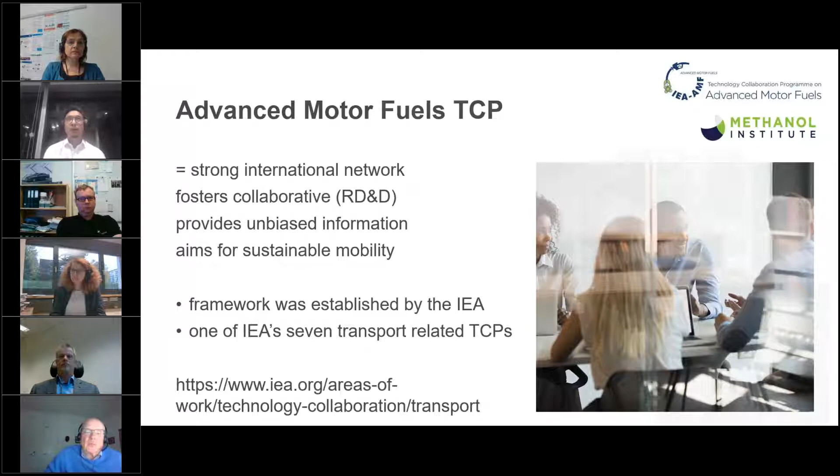So the idea here is to pool and leverage knowledge and research capabilities from different countries, and in fact different regions of the world, exchanging best practices. We try to take into consideration local conditions. All countries are not the same, and there are different ways, incentives and hurdles when you introduce new fuels and new vehicles on the market. AMF does not pursue individual interests, and what we want to be and what we are is a kind of international clearing house for unbiased information on various fuel technologies.

So actually AMF was started in 1984 as alcohols as motor fuels. Our roots are deeply in alcohol fuels. In 1990, the name changed to alternative motor fuels, basically making space for methane gaseous fuels. And as of 1999, we are advanced motor fuels.

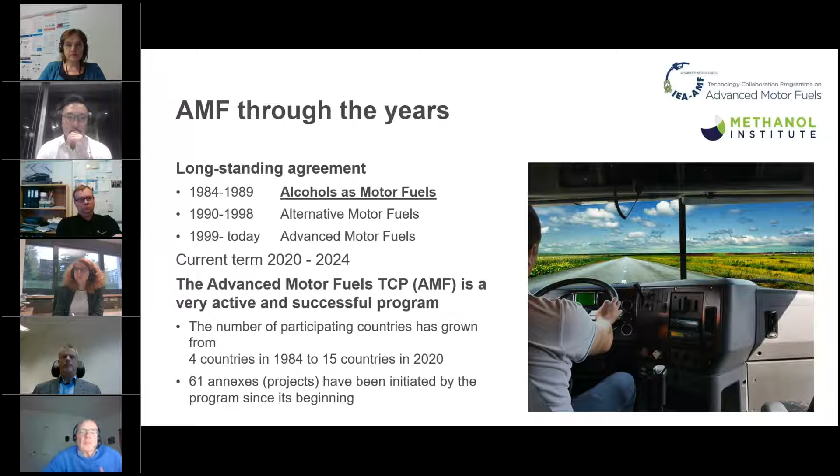So actually, to call ourselves advanced motor fuels is a smart way of allowing us to work on basically any fuel. There are some criteria. We have defined that advanced motor fuels are fuels that reduce greenhouse gas emissions, improve life cycle efficiency, have high energy efficiency both in the production of the fuel and the end use of the fuel, have low toxic emissions, enable fuels for new propulsion systems, and also fuels which contribute to the security of supply.

So AMF works on the entire spectrum of fuels, from feedstock through fuel processing, distribution, and finally end use in vehicles. However, we have to state that our focus in most cases is on the end use of the fuel. We of course work close together with other TCPs, and also cooperate within the end-use working party of IEA, and in some cases also with direct interaction, as in the case of Annex 56, which we have conducted in cooperation with the Methanol Institute.

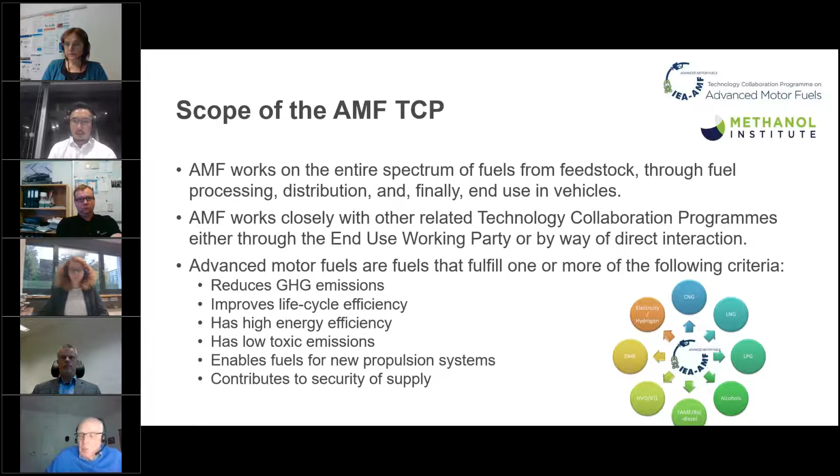So in our new strategic plan covering 2020 to 2024, we have stated a vision for AMF: advanced motor fuels applicable to all modes of transport significantly contribute to a sustainable society around the globe. So very important is that we can generate unbiased data for decision making on all levels of decision making. And as said, we are able to pool resources and share best practices around the world.

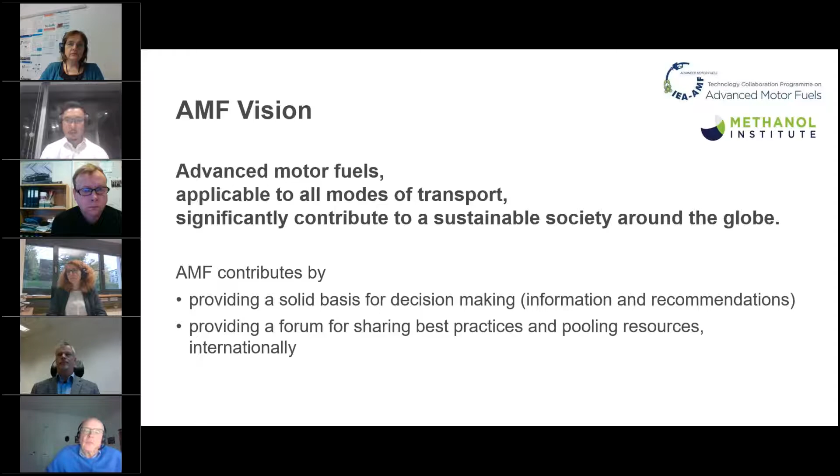So AMF and methanol. I think that methanol is definitely on the radar screen of AMF. Methanol is a versatile energy carrier. We have efficient processing of the fuel. We have multiple feedstock options, both fossil and renewable. There are no carbon-to-carbon bonds, which means that you have practically soot-free combustion with methanol.

There are several engine technologies possible based on assisted ignition. I guess that Martin will comment on that part. There is potential for high engine efficiency, and in fact, methanol fulfills most of AMF's criteria for advanced fuels.

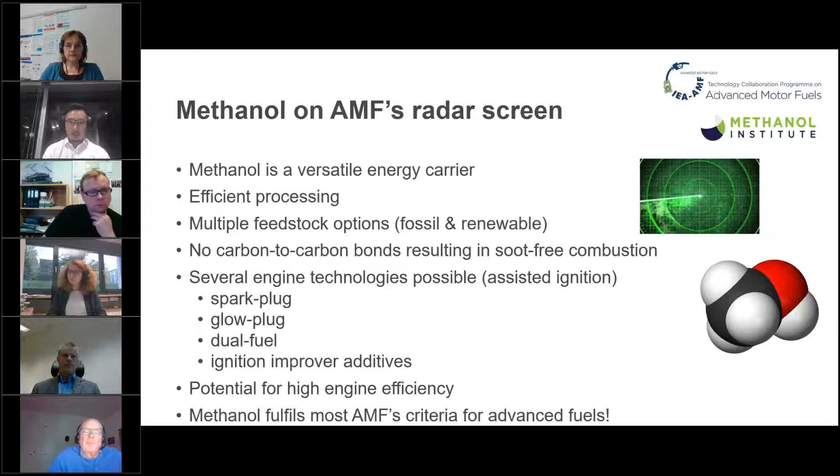As said, AMF started as an agreement on alcohol fuels, and over the years there have been many projects or annexes including alcohol fuels, meaning that we have had projects where we compare, for example, renewable diesel, gaseous fuels, alcohol fuels, and some of the annexes have been specifically on alcohol fuels.

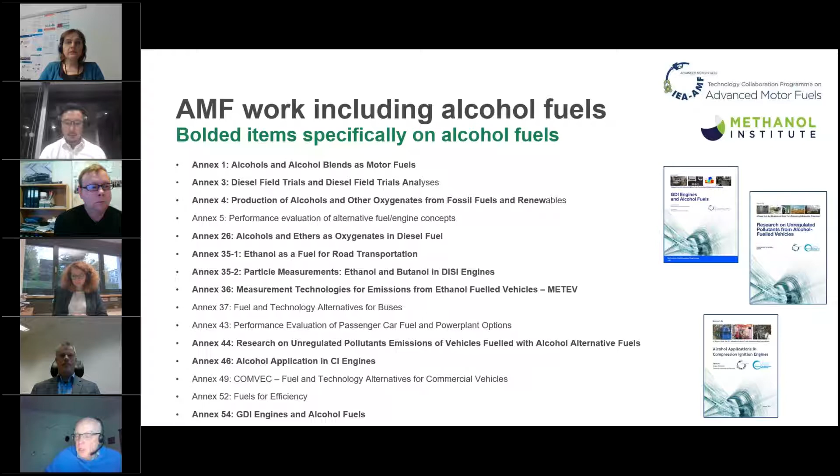So if we pick some of the newer ones, Annex 44 was research on unregulated pollutant emissions from vehicles fueled on alcohol fuels. Annex 46 was alcohols for compression ignition engines. Annex 54, GDI engines and alcohol fuels. And now the annex we are talking about today, methanol as motor fuels.

We are about to end a large project called Heavy Duty Vehicle Evaluation, and this covers diesel, renewable diesel, gaseous fuels, but also ethanol for heavy duty engines. And quite surprisingly, the ethanol engine actually showed the highest efficiency of all the vehicles, all the engine technologies tested. We expect that report to come out sometime early next year.

So we have, as said, 15 countries from all over the globe, from the Americas, from Europe, and from Asia. And there is a large number of research institutes and organizations participating in this work. So whatever we do within AMF has to have an international dimension.

So the AMF contacts, which you are free to make contact to, are the chair, Jesper Schramm of DTU in Denmark. We have regional vice chairs, Mr. C.B. Lee from Korea, and Mr. Michael Wang from the US. And our secretary, Dina Bacovsky, is in Austria, so she's based in Europe.

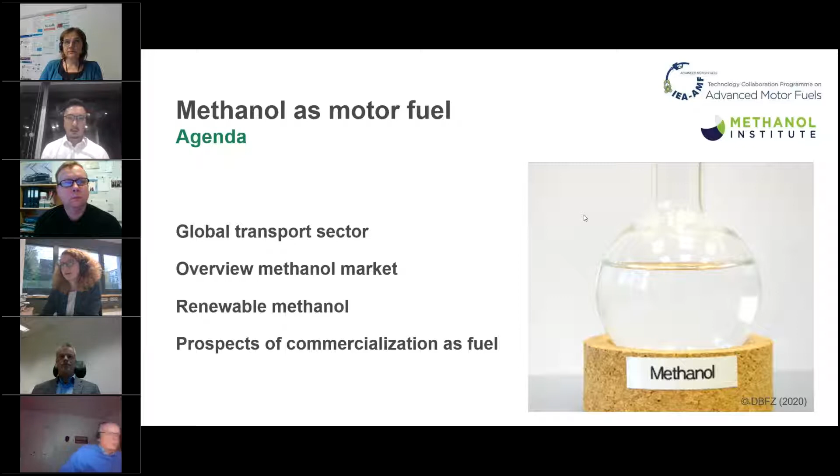Again, welcome from my side. I would like to give you a short introduction into the market of methanol and the role of renewable methanol. Tim, could you just go ahead with the next slide, there's much delay here.

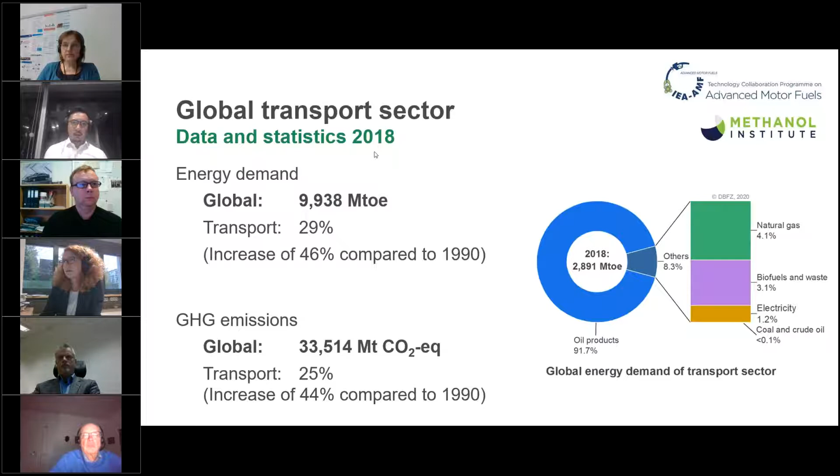Please, the next slide. Here you see the development of the methanol market as it is in the past years. We show here the capacity and the demand and use of methanol in different sectors. You see the main part comes from fuel applications, as straight or blended fuel, as intermediate for biodiesel production, MTBE, or like dimethyl ether or methanol to gasoline.

And of course, which is a minor role today but we will have an example on that, the role of methanol as an energy carrier for fuel cells. You see that the capacity increases quite a lot in the last years. We have more than 150 million tons of production capacity worldwide available.

There are many different applications of methanol. The main driver we see on the fuel market as a motor fuel is in China, where we have more than 100 million vehicles using methanol as a straight or blended fuel. As we will hear from the others today, there are also some interesting applications in the marine and fuel cell sector. But keep in mind, the key message here is methanol as a multi-purpose fuel, motor fuel application is just one part of them.

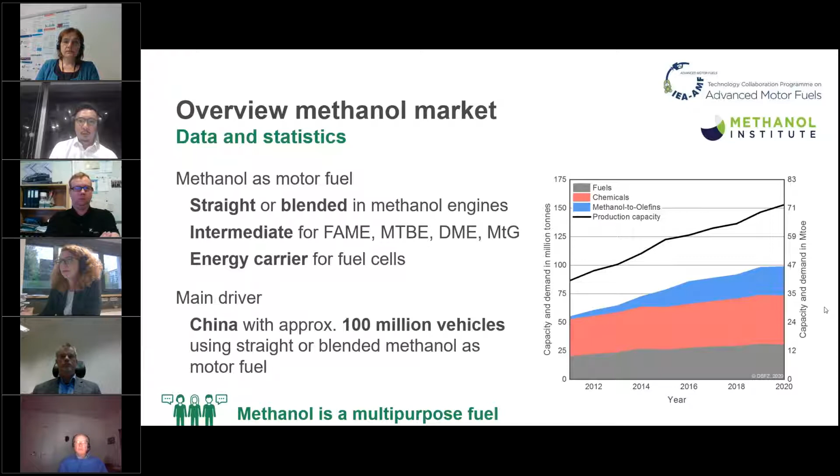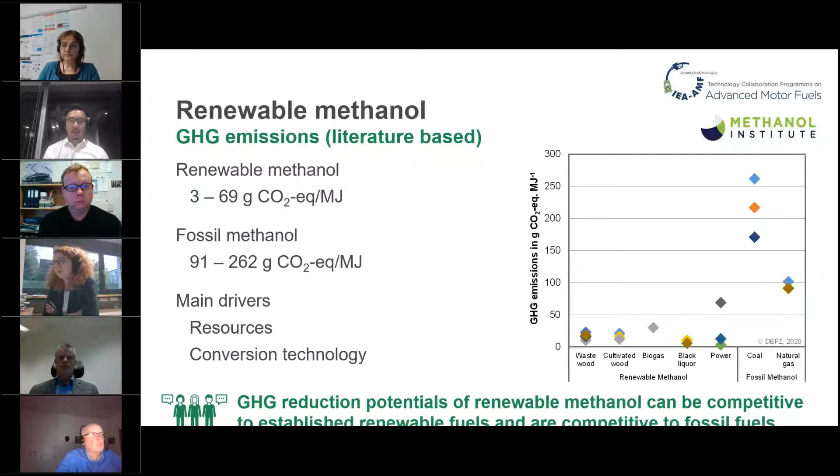Thank you. The same we did for GHG, we also did for production costs. Here we analyzed different literature-based analyses, normalized them to 2018, and compared them with different price levels, as you can see here. So of course renewable methanol, like other renewable fuels, is more cost intensive compared to fossil methanol, which is usually made from natural gas and a bit from coal, but natural gas is the most important resource for that.

We see that especially for power-based methanol, we have a wide bandwidth of production costs. And here again, just for information, renewable motor fuels in Europe have some price levels for ethanol as an alcohol, but also for biodiesel and biomethane, which are in that case also competitors for methanol. But anyhow, here you see again that in that umbrella, methanol could be an interesting option for the future as well.

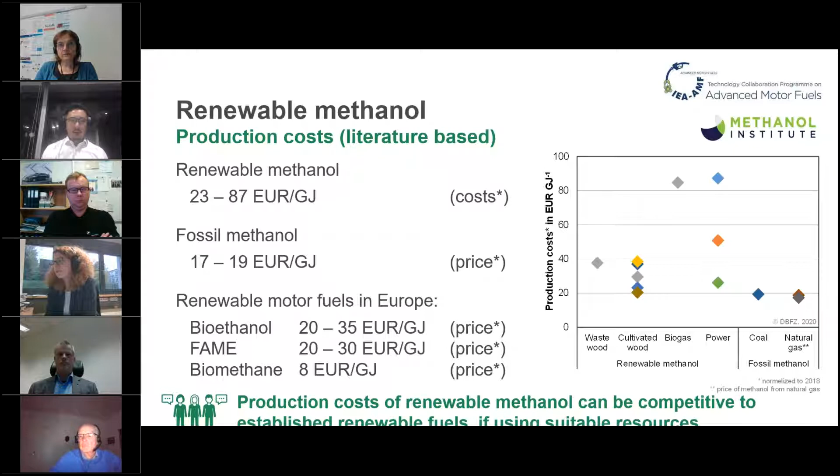Last but not least, please the next slide. It's quite important also to consider what are the prospects of commercializing methanol as fuel. As Niels already mentioned, methanol has a long history with different successes, so to say, in different regions of the world for different applications. And we see, like for other renewable fuels as well, that we have different barriers to be fulfilled on functionality, on scalability, but also on affordability, and last but not least on sustainability, which not just covers GHG mitigation but also several sustainable development goals.

These have to be covered or kept in mind regarding issues related to the use of methanol as motor fuel in different applications, like light duty and heavy duty. We will hear about different examples, but also the scalability with regard to infrastructure issues, with regard to supply of affordable amounts of methanol for the market.

And then this has to be brought in line with issues related on the strategy side to develop roadmaps, to develop stakeholder and shareholder networks from a very early beginning of implementing renewable fuels, together with issues related to technology aspects regarding the vehicle, but also methanol supply, but also regulations. Fuel standards are one example. Legislation to be mentioned, for instance CO2 regulations for different new fleets, including renewable fuels as well, for instance, fuel standards related to higher amounts of methanol blending, to mention some examples.

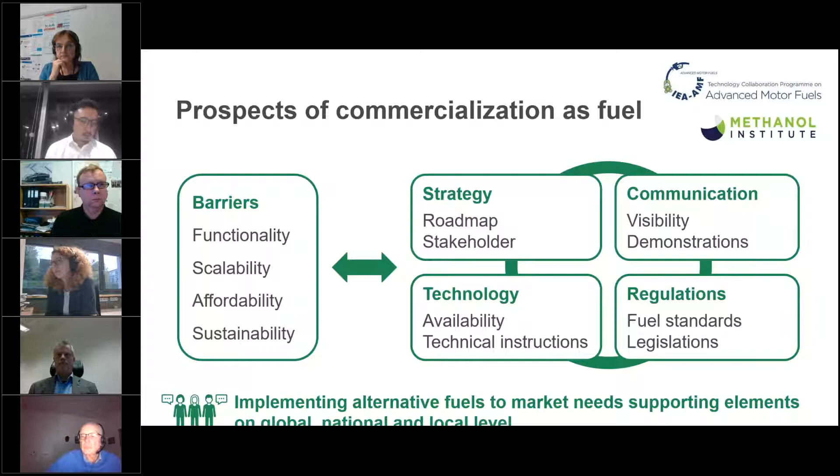So there are, the next one is my last slide, to be concluded with some of the key messages highlighted here. The others can be read in the summary report. As I mentioned, methanol is a multi-purpose fuel. One has to have this in mind when considering methanol also as a transport fuel. So there are interactions between the different markets and also the competitors, of course. I hope we could show that there are production costs and GHG reduction potentials for methanol that could be competitive also with other renewable fuels.

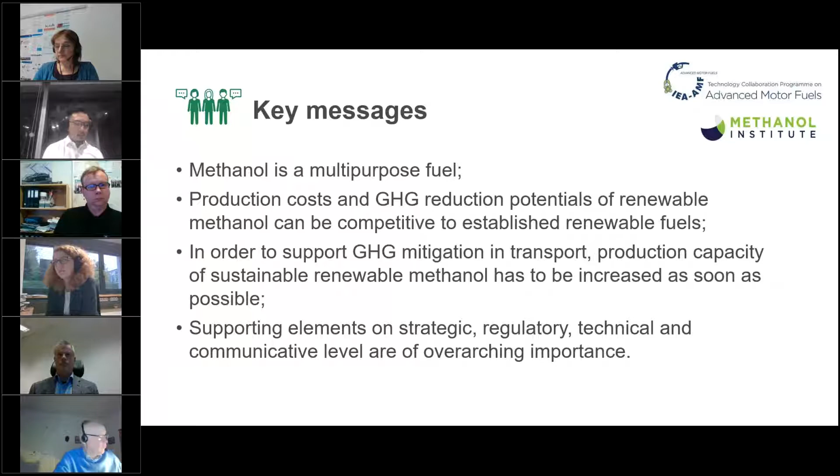I hope that we could show that we can also have an interesting impact for GHG mitigation and transport when increasing production capacities of renewable methanol. For our understanding, this is key when rolling out new alternatives again, or in some markets for the first time. And for realizing that, supporting elements are quite urgently needed on a strategic, regulatory, technical, but also on the communicative level.

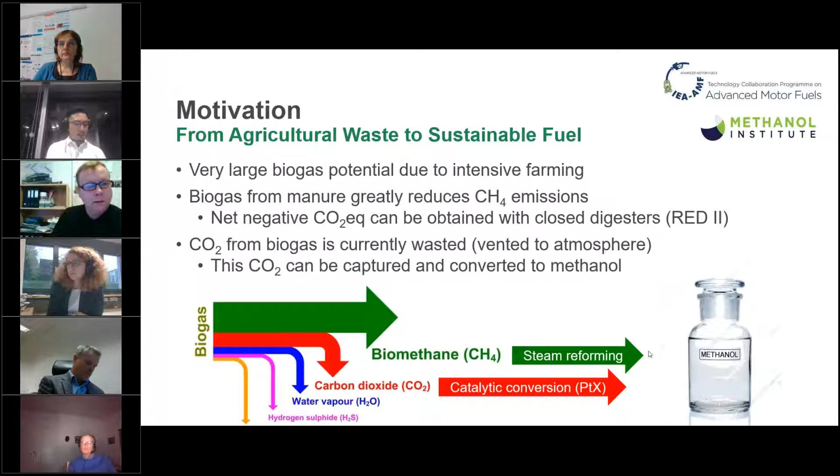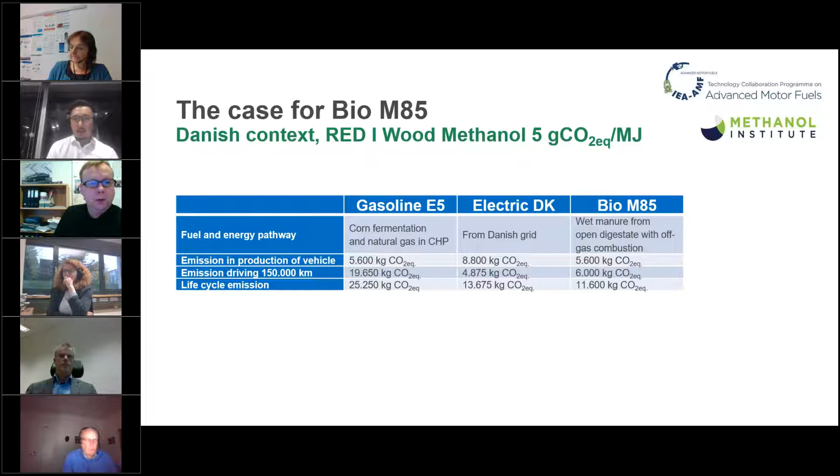I'm going to move on. So you might ask, if we have all that biogas, why don't we just use that directly? Or why don't you use the hydrogen from the wind power? And why do we want to make methanol? Well, simply it's more feasible for storage and distribution. If we were to use methane, we could do so, but we would require a lot of new fueling stations and also new cars, because current cars on the road do not run on methane.

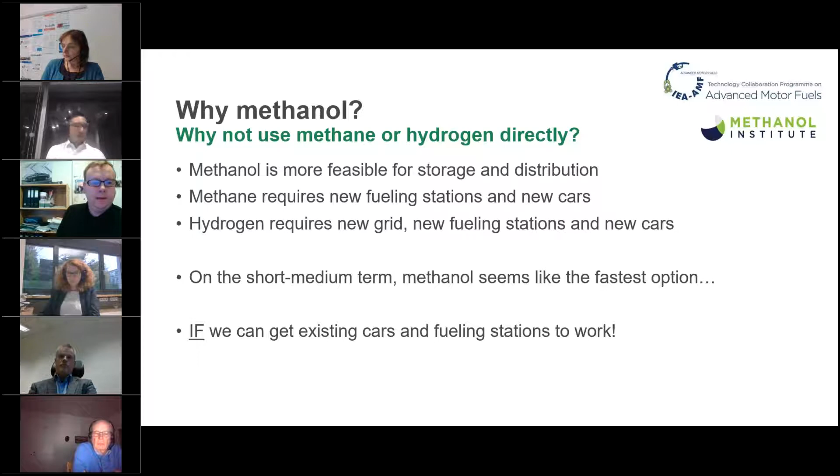Now, hydrogen would require a whole new grid because we don't have a grid for hydrogen. It would also require new fueling stations and new cars. So in terms of cost and time, it seems that on the short to medium scale, methanol is clearly the fastest option, if, of course, we can get the existing cars to work and the existing fueling stations to work.

Now let me talk a little bit about the cars. We've been looking at 2 cars so far. This is the old one, 2008 model. This type of car is actually very popular in Denmark, very small, but it does the job from A to B. It's a Euro 4 emission class, and it will run on pure methanol once it's warm. A cold start is another issue.

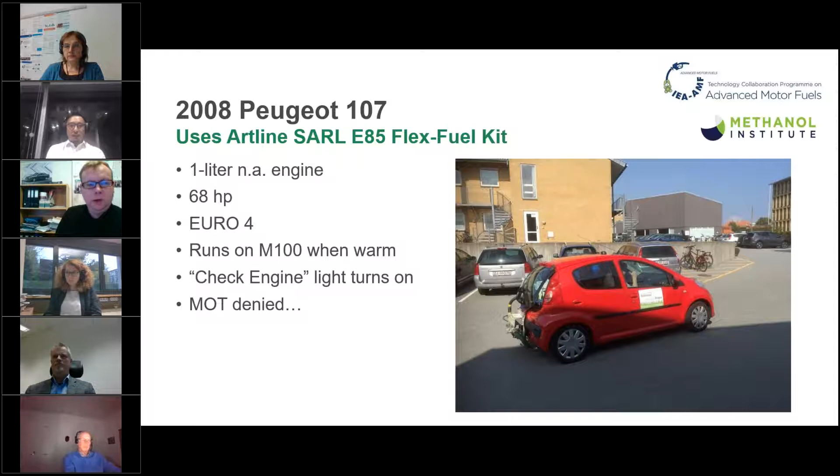However, when we use this Artline E85 Flex Fuel kit, it dramatically improves the running, and it improves the NOx emission, not the least. But anyway, once we've driven a few days on the methanol, the check engine light comes on, and when it does that, it's technically not legal to drive the car anymore. So we can't get an MOT on that. So we kind of gave that up and moved to a newer one.

This is the new one. This is a 2020 model, a bit the same size of car, but a much more modern engine, much cleaner vehicle. This is a Euro 6, so it meets the highest emission standards that we know of. The engine calibration was done by a race tech company, 2M Teknik in Denmark, the company that usually builds race cars, and it runs actually very well. There's no physical changes to the car, only software changes, and we're quite happy with that one.

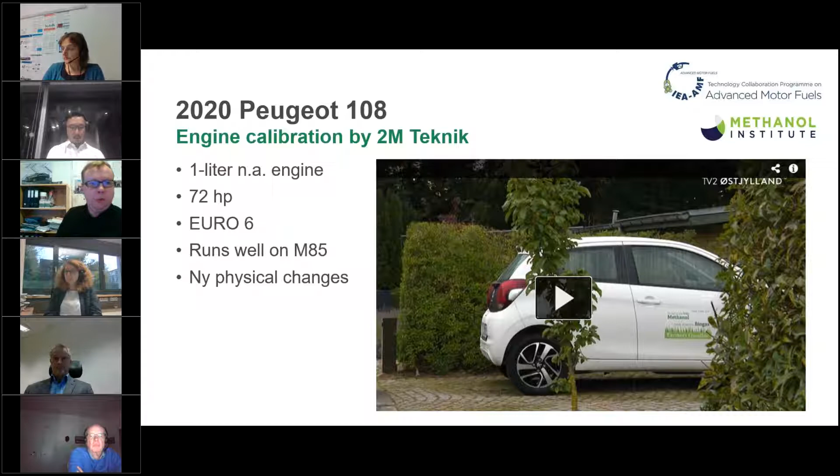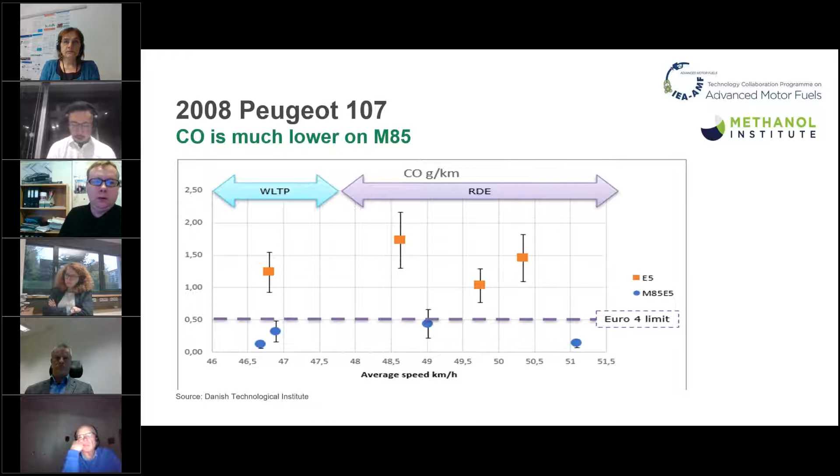Let's have a look at the CO emission, carbon monoxide. Well, that's clearly much lower on M85. There's really no question about it, and we are way below the limit. And with the new vehicle, we are even way below the Euro 6 limit. So it's very close to zero actually. So not at all a problem here.

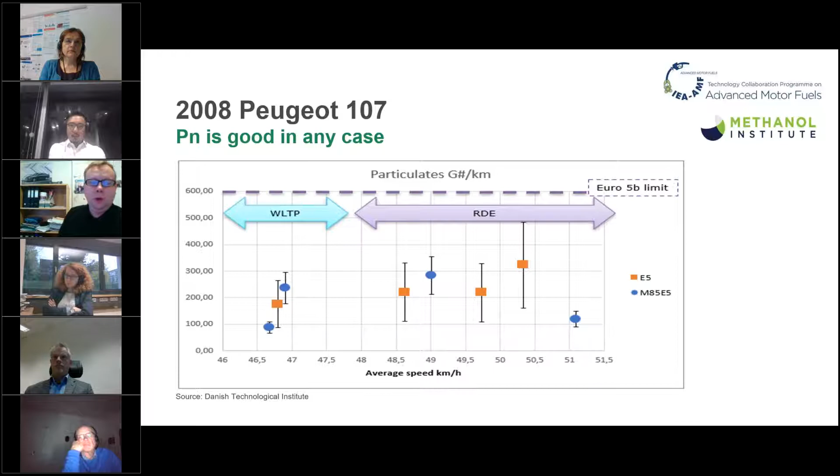Looking at the particulates, well, that's not a problem at all. This Euro limit 5B is actually still the limit for Euro 6. And you can see that we are well below the limits in any case, on both methanol and gasoline fuel. So we don't really have any problems here.

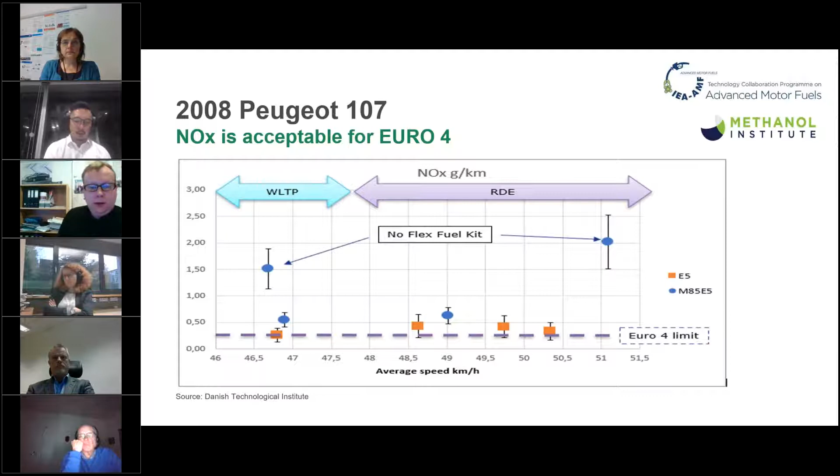Now, in terms of NOx, things tend to get a little worse. Before we installed the flex fuel kit on the red car, you'd see the two measurements that are actually quite high, up to 2,000 milligrams, and the current limit for new cars is 60 milligrams. So that's quite a bit of a way. But as you can see, the use of the flex fuel kit did actually improve things a lot, and we got very close to the values of gasoline, but not quite to the Euro 4 limits. So we have something still that we need to improve.

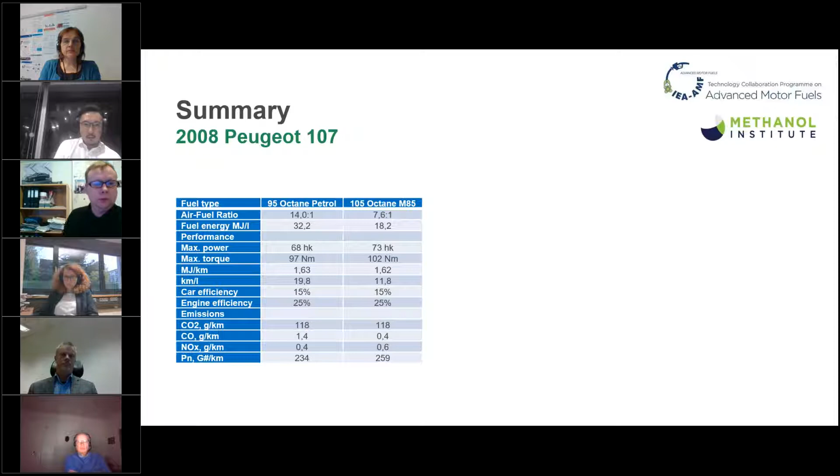And the carbon monoxide is much better on methanol, NOx a little bit worse, particulates good in any case. This is the absolute latest results that we did just last week, and this was actually an attempt at a full Euro 6 emission measurement on the white car. As you can see, we were actually very close to getting the full certification values. The trip average was approved, just with a small margin, but the city cycle itself was a fail. So we're going to have to redo that, and the car is already back in the 2M workshop to be further optimized for cold start and city driving. I'm sure in a few weeks we will have this perfect result to show you.

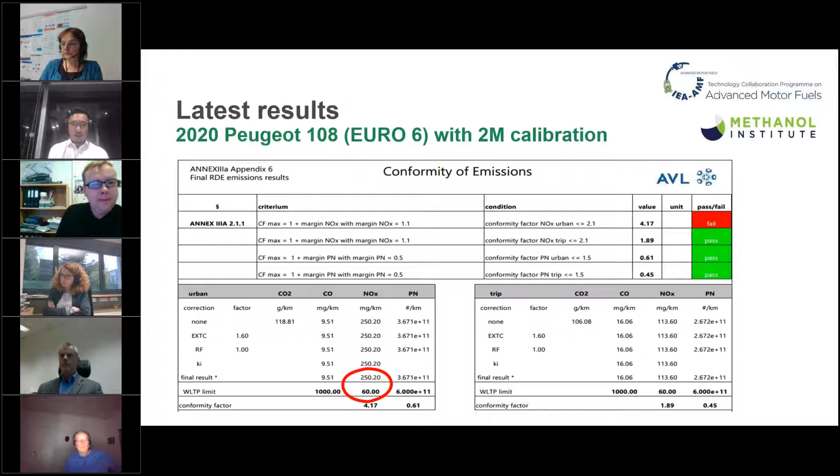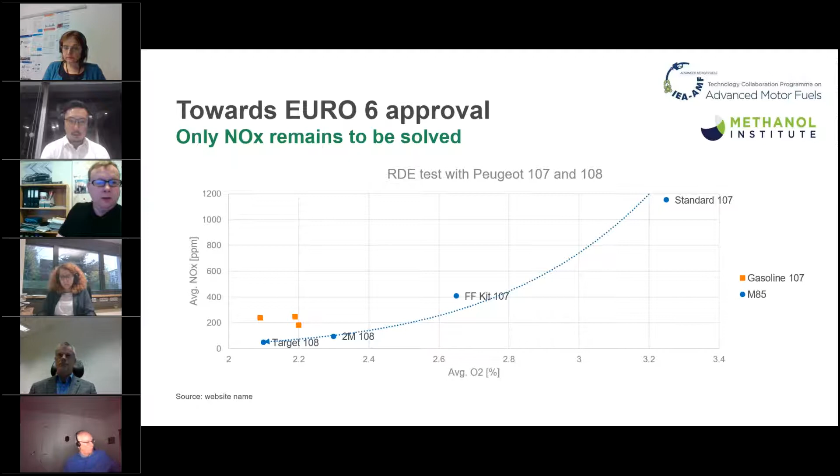So just to show you the progress that we made from the standard 107, this is in ppm. We started with just over 1,000 ppm on the first trial. Then we put on the flex fuel kit and got down to 400. Then the new car was down to 100 on the first try, and the target is about 50, so that's what we're going to try and reach now. The yellow dots are the gasoline measurements.

So what are we going to do next? We're going to make a bigger demonstration program to include 100 cars. They will all be optimized using the 2M technique. We will have the big energy companies distributing the energy, we will have some of the big cities using the cars, and we even have a company who makes the tanker vehicles on board. We also get support from the Danish Energy Agency, so all in all we anticipate a lot from this project. I think we will be running around Christmas, probably, the first cars, and we will have 5 or 6 fueling stations in place.

So just a few words on the barriers. Of course, we know that methanol has been used for many decades, maybe even 100 years, as a motor fuel. Why is it not used today? Well, first of all, there are such things as exchange agreements. When we distribute fuel all over Europe, there are agreements between the different companies who will buy, store and exchange, and some of them might not want methanol. So that's one reason why there would not be any methanol in, for example, the Danish fuel. Just a few years ago it would simply not happen. I think actually they did change the agreement now, so now at least it could happen.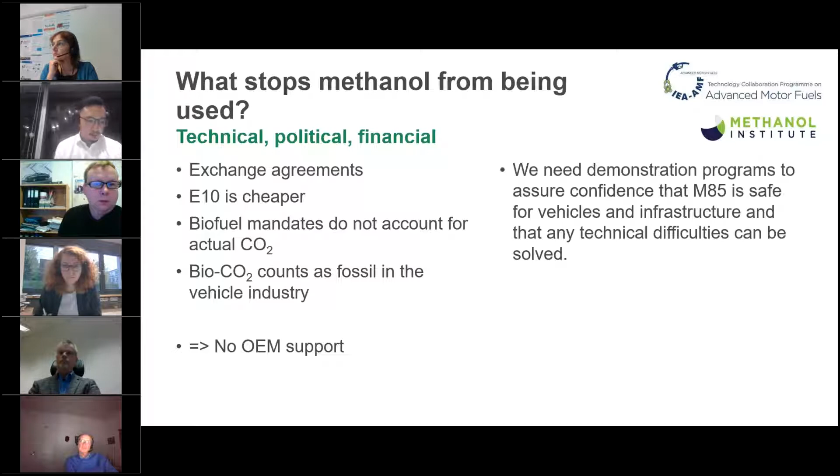Thank you, Kim. I know that I said we'll ask questions at the end, but well, I'm moderator today, so I'm going to indulge a little. I just wanted to bring up a point before I forget, when we get into the Q&A session, that you drew up in one of your last slides where you said biofuel mandates do not account for actual CO2. I think that's a really complex question when you're taking into account some of the key legislation at play here. I'm assuming one of which will be RED2, where even biofuels are also affected by indirect land use change, etc. Do you have any idea how some kind of harmonization, as well as alignment, can be made in terms of policy to bring biofuels and CO2 into the same discussion, where a solution can be beneficial for both the production of biofuels but also while taking into account CO2 reductions?

What I know is that this is actually being discussed in parliament right now, and the Danish government is going to come up with some kind of plan for giving a CO2 mandate rather than just a biofuel mandate. And if they come up with a good plan, probably that will spill over to the rest of Europe, and we'll see.

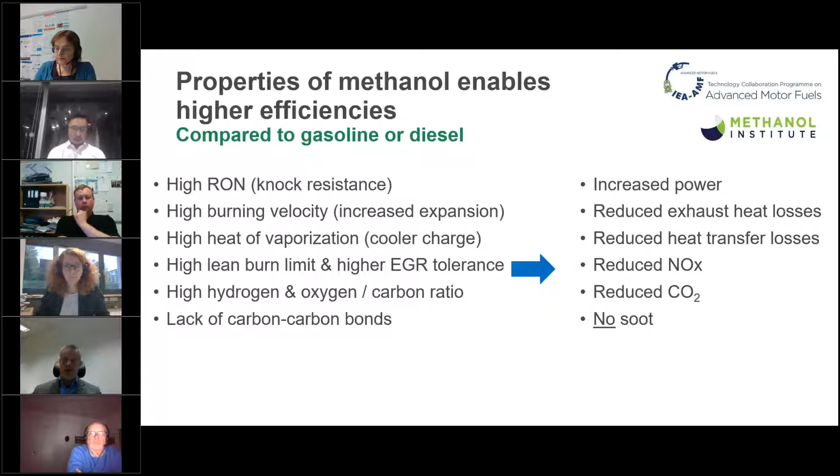When it comes to combustion engines, it's really nothing new with methanol engines - it's been used for a very long time in high power applications. For instance, during the Second World War, you could almost double the power output of a combustion engine by feeding it with methanol, to fly away from your enemy and survive that day. So it's been popular in motorsports applications, and also used in very small applications like model engines, in super big engines for the maritime industry where emission performance is especially important, and also used in car engines - E85, M85 engines, just like we saw before.

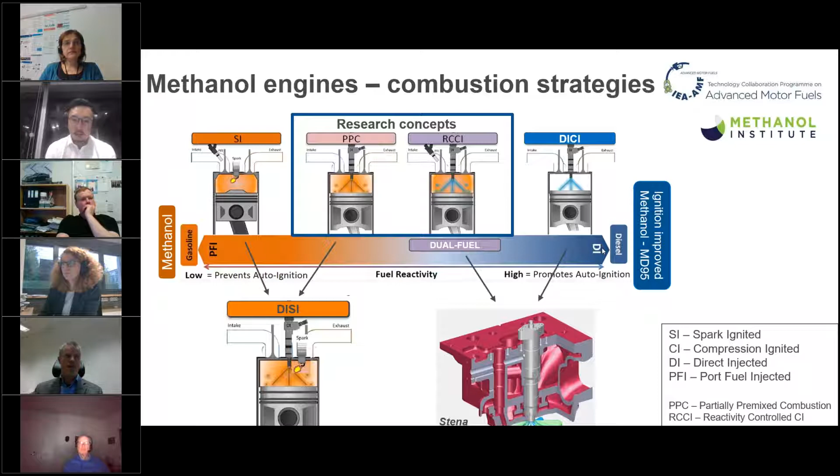So if we start by looking at methanol in conventional gasoline engines, the DISI engine I was just talking about - there are a number of these type of engines on the market right now. In this case, it's a Hyundai engine. Just recalibrating it slightly so it was possible to use methanol, we could see that the efficiency was improving quite a lot actually, without any optimization really towards methanol. So a stock gasoline engine can be adapted for methanol with higher efficiency. It's pretty remarkable, I would say.

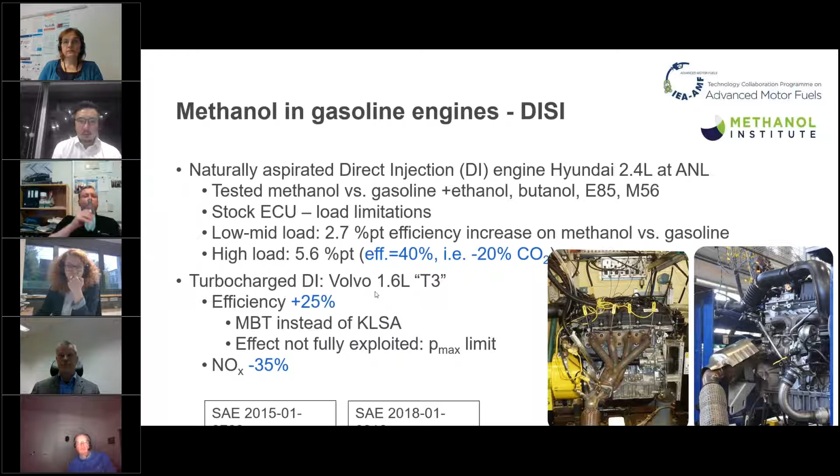You could go even further if you could optimize this particular engine. One way is to turbocharge the engine, like the engine to the right here, which is a Volvo engine, and then we can see even higher efficiency by using methanol compared to gasoline.

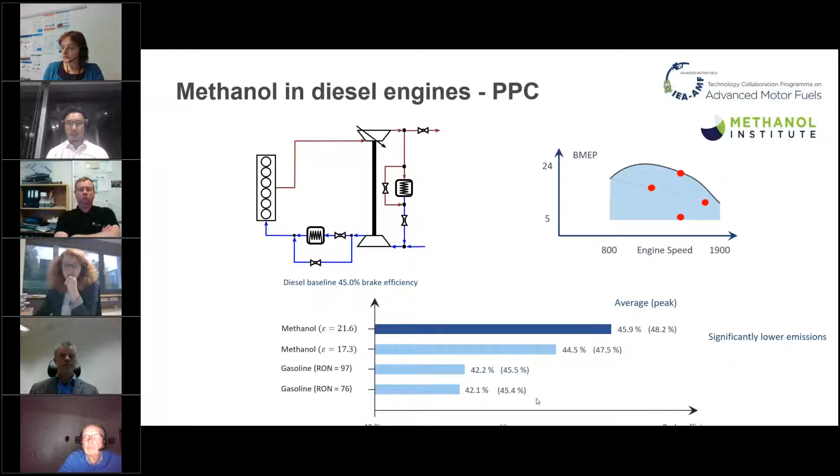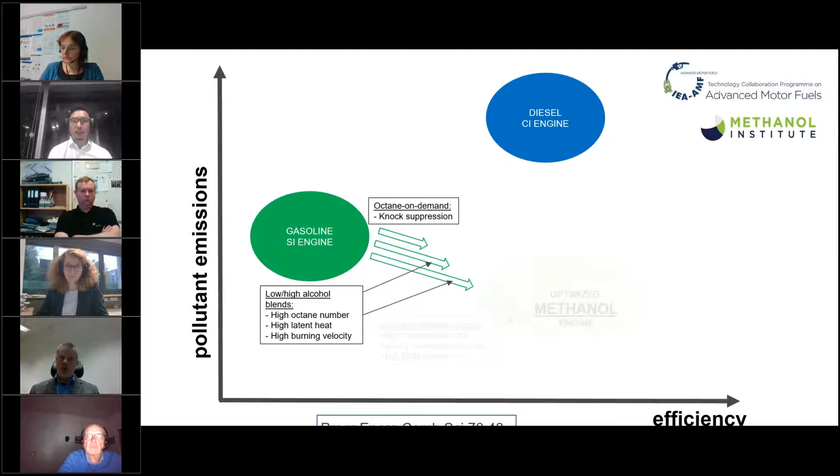To give you an overview of how we could develop the concepts further, on the left axis here we have the pollutant emissions, and we have efficiency on the x-axis down here. We have the gasoline engine in green to the left, and to the upper we have the diesel engine, with standard calibrations. You can see the diesel engine is more efficient, but not as clean as the gasoline engine. To improve the efficiency of the gasoline engine, we need to do something about the knock - this is a big problem for gasoline engines.

And we can use something called octane on demand. We could fuel a little bit of methanol into the engine, and that improves the efficiency. If we increase the amount of methanol in the fuel, in the gasoline fuel, we are improving efficiency even further.

If we could calibrate and build a dedicated methanol engine with the correct compression ratio, more downsized, and using high EGR or dilution ratios, we are improving efficiency to a level actually higher than a diesel engine. You can also work with waste heat recovery to take even further steps from that.

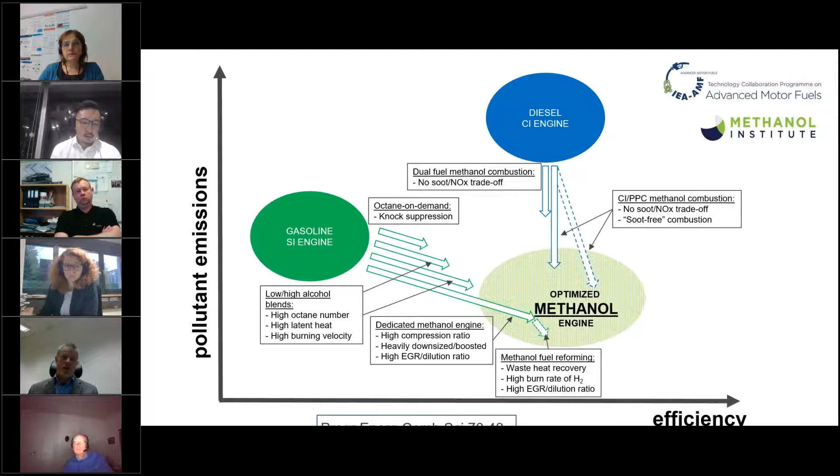Going from a diesel engine base, the blue box up here, you can do the dual fuel strategy like you have in the Wärtsilä engine on board the Stena Germanica. With dual fuel combustion you have reduced emissions, especially that's the benefit there. And if you make a compression ignition engine dedicated for methanol combustion like PPC, then you don't get any soot at all. You're using 100% methanol fuel, and you can focus on reducing the other emissions and improve efficiency even further.

So we see a large potential for improved efficiency and reduced emissions by shifting fuel to methanol.

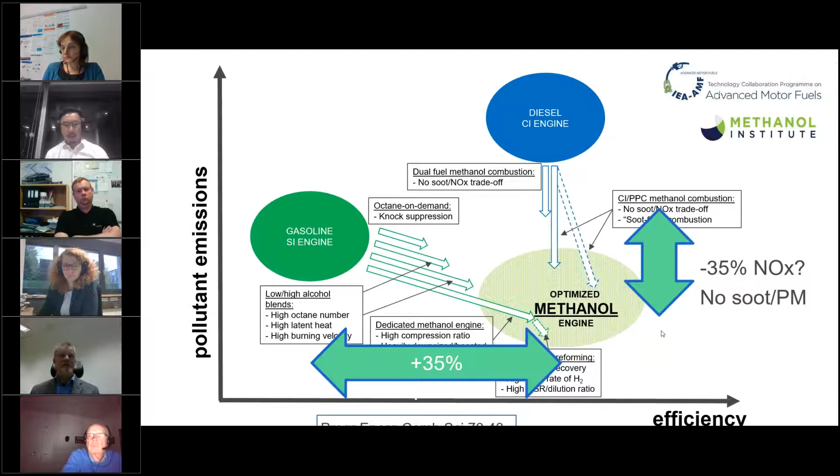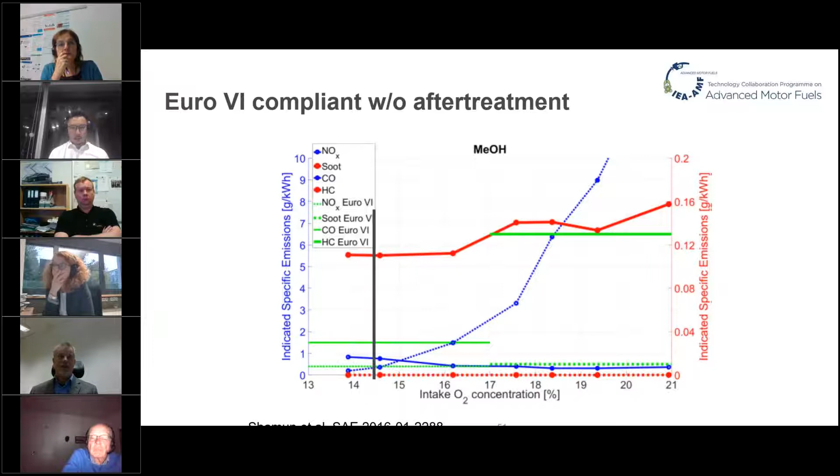When it comes to car engines or more conventional type gasoline engines, they are approaching 50% efficiency. One example is the SIP program in Japan, where high-octane gasoline engines are surpassing the potential for high-cetane diesel engines, which is quite remarkable really. The strategy for those engines is to run them ultra-lean with assisted compression ignition as critical factors.

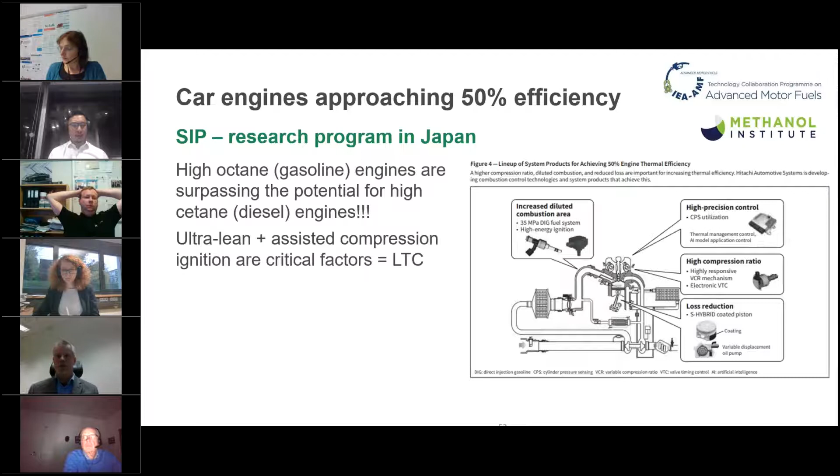That brings us closer to what is known as low-temperature combustion, similar to PPC strategies.

In Lund, we're working together with Volvo on a new advanced concept called the double compression expander engine, which separates different cylinders for different tasks. By that, we can reduce friction and heat losses in a quite dramatic way. According to our simulations, we reach about 56% efficiency, or the potential is there at least. We have built a prototype now and are doing our initial experiments to see if we can actually reach those in reality as well.

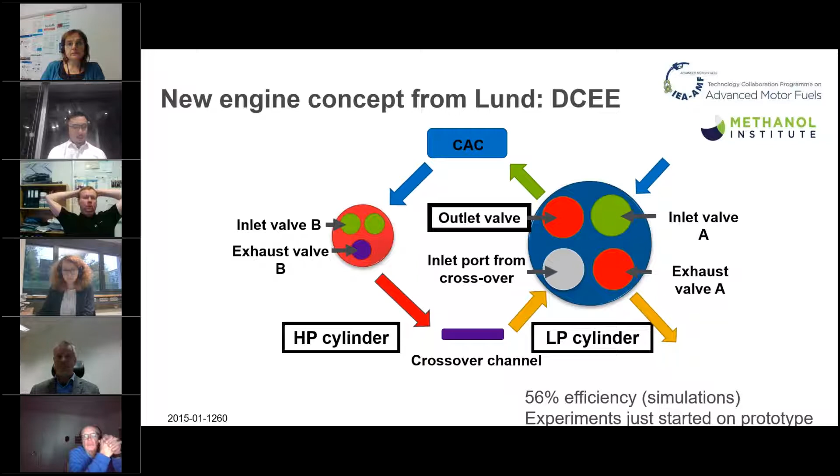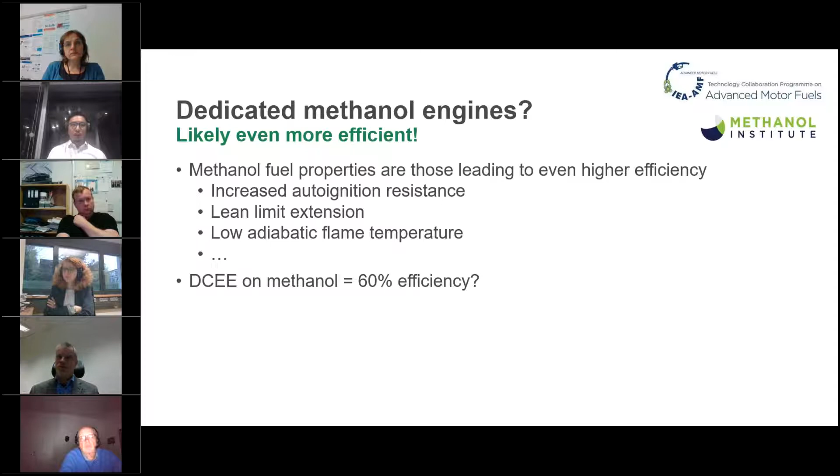Even though we have all this tremendous development on gasoline and diesel engines, the beneficial properties from the methanol fuel still remain. We have the increased auto-ignition resistance, the lean limit extension, and low adiabatic flame temperature, all features relevant for the modern or advanced combustion engines that we see coming. So I think we will see this benefit on efficiency also in the future compared to gasoline and diesel. Maybe we could see a 60% efficient DCEE engine on methanol in a couple of years. I hope so.

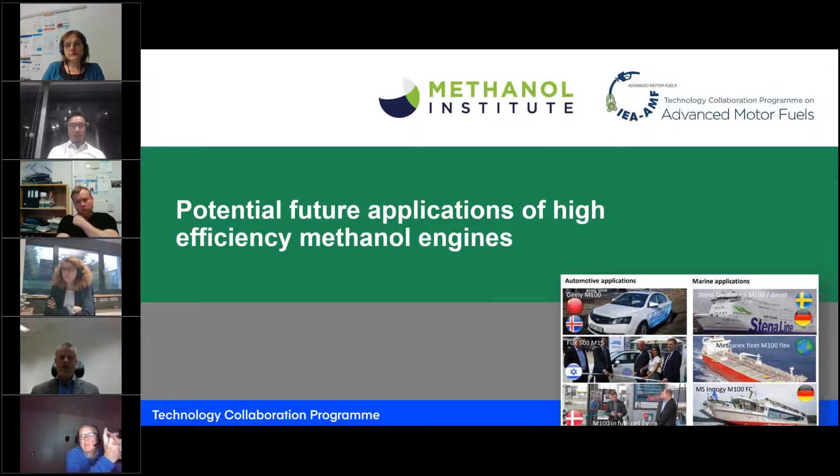So what applications can we then have for these high efficiency engines and methanol engines? The figure to the right is showing that there are a number of groups in the world working with methanol engine applications, so we're not alone at all.

Considering that there are not so many fueling stations with methanol available today, I think the first steps for use of high efficiency methanol engines should be within captive fleets, especially in sectors with high energy consumption. The maritime sector is one important sector to get started with methanol, and they have already started due to the beneficial properties in terms of emissions. It's also important to remember that methanol as a fuel has a much reduced risk in terms of fuel spillage compared to gasoline and diesel.

That is also a quite nice feature if you consider fuels for the agriculture sector or the forestry sector, which I think would be the next step in captive fleets for high efficiency methanol engines: high energy consumption, and very important of course to have that as a sustainable sector. Other sectors consuming a lot of energy are the long haulage sector, where it would make sense to also have methanol engines.

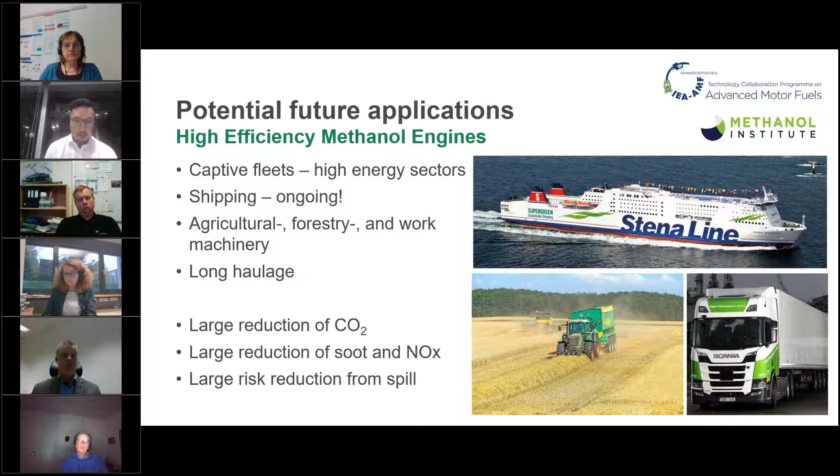Methanol is currently accepted for a drop-in of about 3% in regular gasoline, according to the EN 228 gasoline standard. That will, of course, lead to huge amounts needed for methanol production, even at only 3%.

The next step is going for dedicated or flex fuel vehicles using high proportions of methanol. One way is to use the gasoline-ethanol-methanol concept, the GEM concept. The figure to the right shows which fractions or blends between ethanol, gasoline, and methanol you need to use to comply with the control system of an E85 car. It's not surprising that methanol works well with these E85 cars, because the whole technology for E85 originates from M85 cars.

When it comes to hybrid applications, I cannot see any reason why it shouldn't be run on renewables. One example of an alcohol hybrid is the concept that Toyota has presented on the Brazilian market, running on E100. I think it's a fairly low technological step to make that methanol compliant as well.

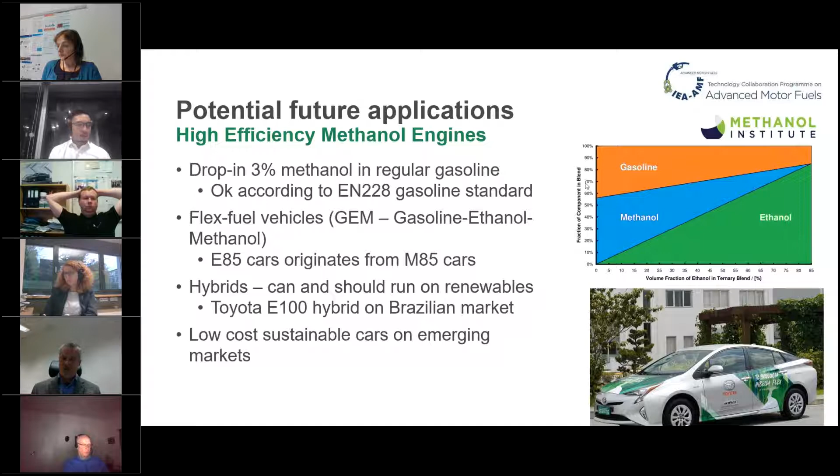On a couple of emerging markets, we already see a large demand for low-cost cars, and methanol engines can be produced at low cost but with still high efficiency—naturally aspirated, rather simple engines for low-cost cars. I think that's a good application.

So we go to some market penetration considerations.

We need to know the challenge—what are we really facing here? Just to give an idea of the scales: the upper graph shows the global production of oil in the world in 2019, about 6 billion tons. The methanol production capacity in the world is the orange dot down here. There's such a vast amount of energy that we need to come up with to replace oil.

Looking at the number of vehicles allowed to use high fractions of methanol compared to the 1.4 billion gasoline and diesel vehicles in the world, it's also extremely small. According to a couple of reports, we are facing a doubling of transportation in the world by 2050 compared to 2010. So how are we going to replace the oil then? It's a huge amount of energy that we need to come up with that is sustainable.

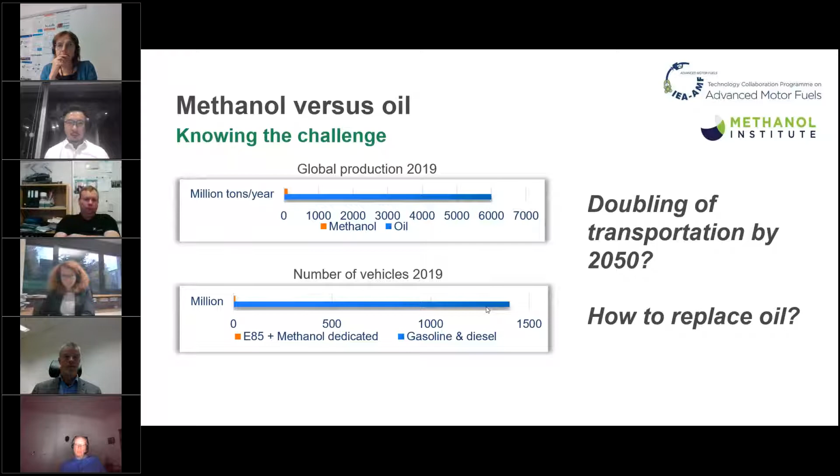Phasing out 6 billion tons of oil annually is not an easy task. There's a number of different ways that can be employed to realize this goal. Unfortunately, the debate is often polarized, saying this is not good and that is not good, and so forth. But I think we need to use many of them to realize this very ambitious goal.

Starting with electric drive on renewable electricity—that is extremely important, of course, but it's not enough. If you want the details, you should read the IEA 2018 report on the future of electric. The main message from that report is that we need to phase out coal-based electricity production first, before moving further on electrification.

HVO is another popular renewable fuel, works great on diesel engines, but it might be prioritized for aviation because it's certified for that in some applications. Biomethane is very important, but probably at too small a scale. Ethanol, yes, great, works well with methanol, but not enough on its own, and the same goes for biodiesel. When we come to electrohydrogen and electromethane, now we have scalability, but these are energy gases, so maybe not that practical for vehicle applications.

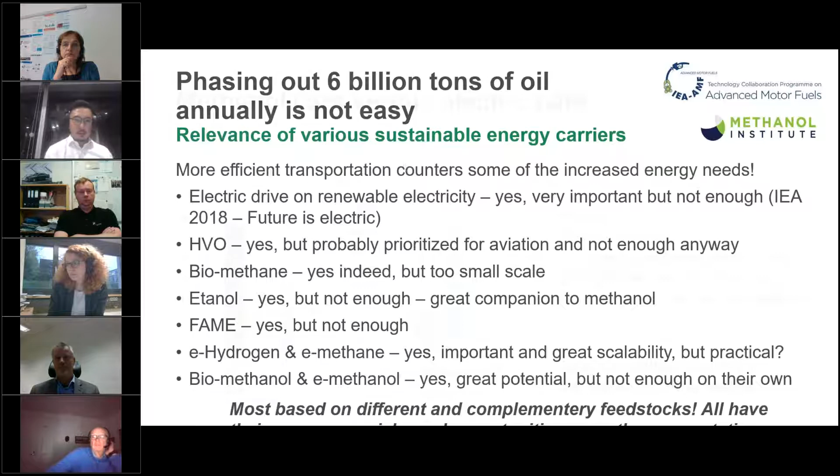We did a similar study in our group that ended up with very similar results to what Kim showed, and I'm happy that we have a match on the figures here. So we did advanced simulation studies on 200,000 kilometers of driving in the WLTP cycles with different fuels and drivetrain combinations. The left figure shows the life cycle CO2 from a diesel car, the grayish one, biomethanol, the green one, and a Swedish electricity electric car, the blue one. We can see that of those three, the biomethanol seems to have the best potential to reduce CO2.

But we took it a further step, and we wanted to understand which is the most cost-effective way to reduce CO2 from transportation, because we have limited resources and we should obviously use the most cost-effective solutions first. So we looked at the production costs of the vehicles, the fuels, and the use of them, and removed all taxes and subventions. So it's a sort of societal cost for reducing CO2.

We compared a number of different fuels, but in this figure you can see biomethanol on the left in green and electric car with Swedish electricity on the right. That shows that biomethanol cars seem to have a very good case. We should remember, of course, that the scenarios are quickly changing. Electrification is becoming more cost effective and so forth, but it's clearly a good case for biomethanol as well. Next slide, please.

So how about barriers from our perspective? We think there are a few reasons why methanol should not become an important sustainable fuel. It is scalable, affordable, and largely functional. The engines are based on simple and abundant materials, so that should not be a showstopper. The potential challenges for large-scale market penetration of methanol engines are more related to lack of relevant regulations.

We heard a bit about that before. There could also be a massive breakthrough on fast charging and new types of batteries for electric vehicles, reducing the cost and so forth, or a strong cost reduction of fuel cells, making fuel cell vehicles a competitive alternative, and also a stronger demand for renewable methanol in other sectors for green chemicals and so forth. Next slide, please.

So my final slide here, the needs for large-scale introduction of high-efficiency methanol engines. We need legislation that is holistic, life cycle assessment based, and provides meaning and long-term stability for the markets for sustainable fuels. The current tailpipe-based regulations are simply just foolish, with double counting and a lot of meaningless ways, delaying important measures against climate change, as I see it.

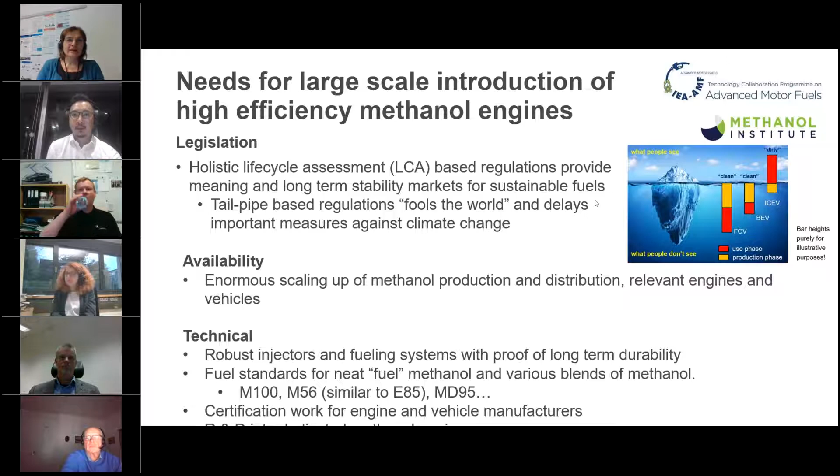So I'm going to tell you about marine methanol, going through why marine methanol is needed, pathways to methanol, then some examples of marine engines and project examples, and then conclusions. Next slide, please.

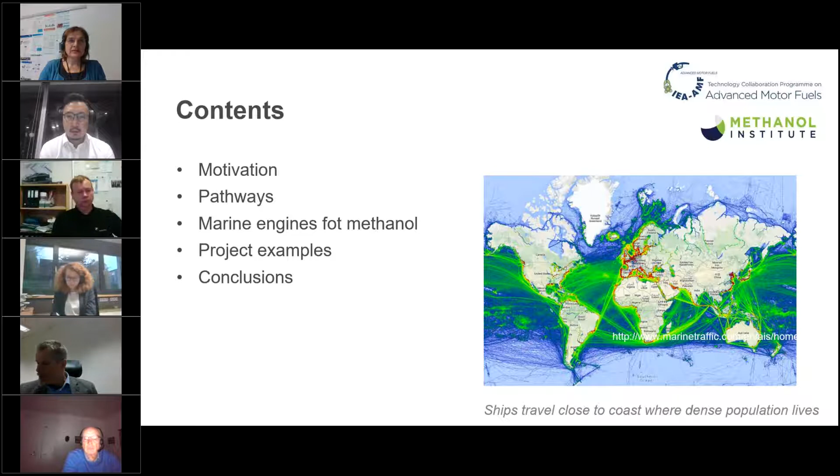First, these regulations applied to sulfur emissions and NOx, nitrogen oxides. And today we are talking about black carbon emissions and methane emissions, which is quite much related to LNG use in shipping. But the new thing now is that the global warming burden of shipping also needs to be reduced. The IMO has announced a strategy to reduce the sector's carbon dioxide emissions by 50% by 2050. This is a big sectoral challenge, actually even bigger than in any other transport sector, because of the long history with affordable, the cheapest fuel that can exist.

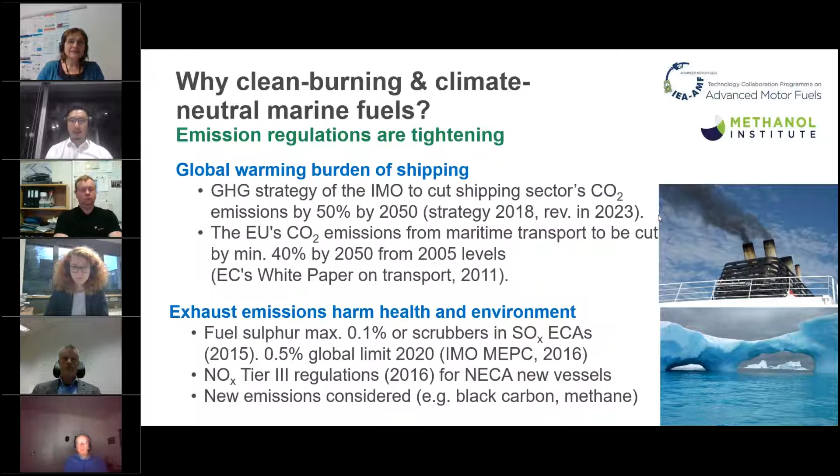Maritime fuels are not used as much as road transport fuels, but the volume is significant. Annually, more than 260 million tons of maritime fuels are used, and only a very small share of that is LNG. Most of that is still residual fuel, and although the global sulfur limit was set in 2020, a lot of residual fuel is still blended with distillate to achieve the 0.5% sulfur limit.

If we go to the IMO strategy to achieve a 50% greenhouse gas emission cut, we need at least more than 130 megatons of clean marine fuels in 2050. That is about the same volume as methanol is produced or can be produced today, but methanol is of course used today for other purposes. This volume of the sector is not as high as the volume of fuels in the road sector.

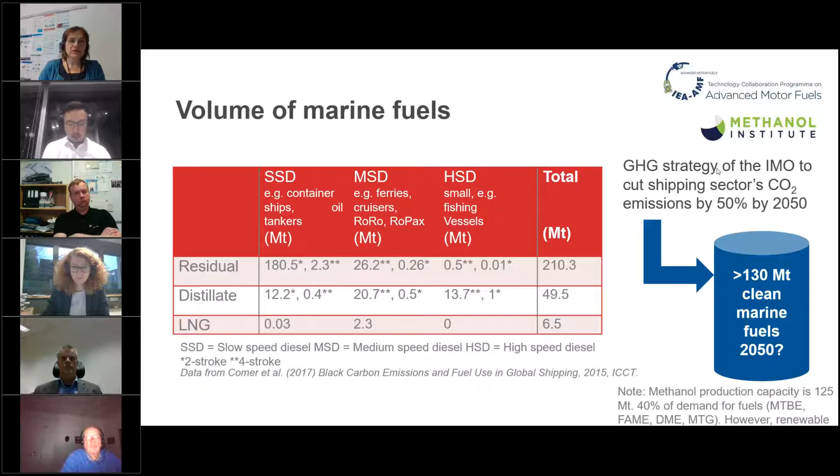When compared to the huge step from cheap fossil fuels to using renewable hydrogen for fuel production, the differences between molecules are smaller.

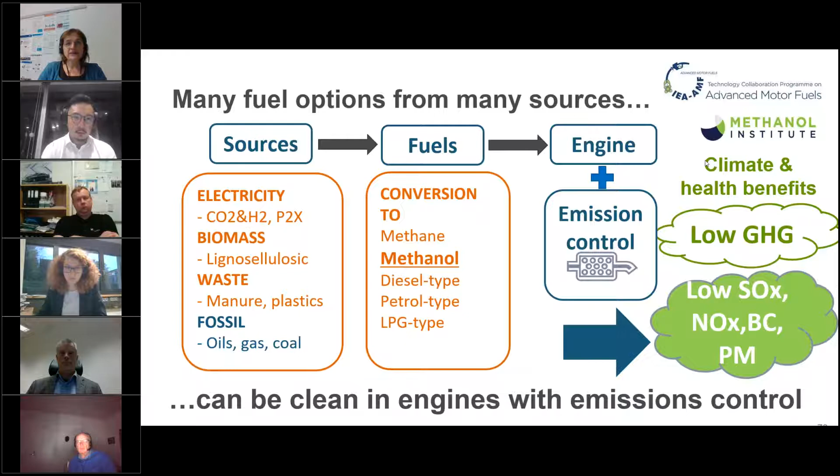This is the pathway from the point of view of synthesis, but we have limited time, so I won't go into this in detail.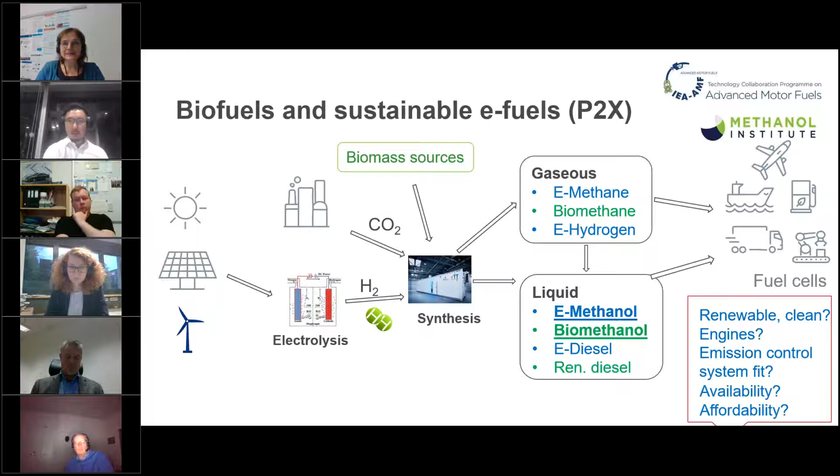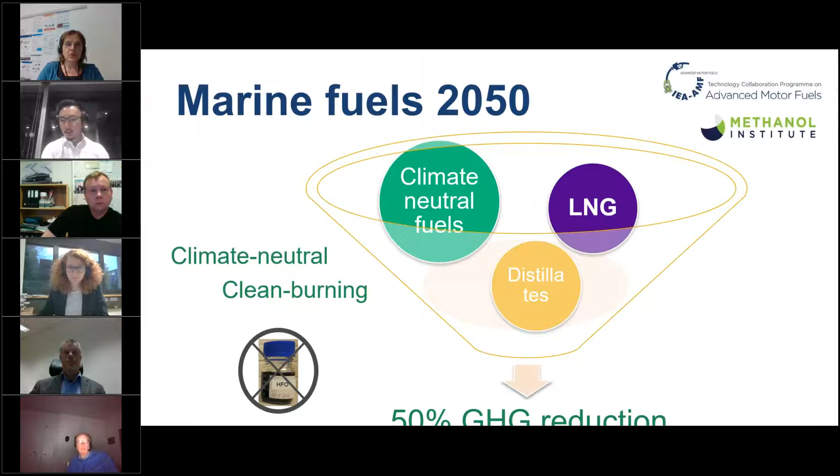How do we see the maritime fuel pool in 2050? For sure, there will be fossil fuels, and LNG is one of the alternative fuels that is going to be used. Most probably we won't have any more HFO-type residual fuel as it is. But then the big question mark is climate-neutral fuels. Which are those? They are going to be some 50% of the pool, and methanol is one option, if it's from renewable sources.

Here is one scenario of transport fuel mix. The brown part of the bar represents fossil oil products. This concerns Europe, but interestingly, all the alternative scenarios end up in a situation where the energy consumption of the transport sector reduces a lot. So if cars become electrified to a larger extent, there will still be liquid fuels, and the question is who uses them. Aviation and shipping sectors will be important in the demand perspective even then, and the mix might be very colorful.

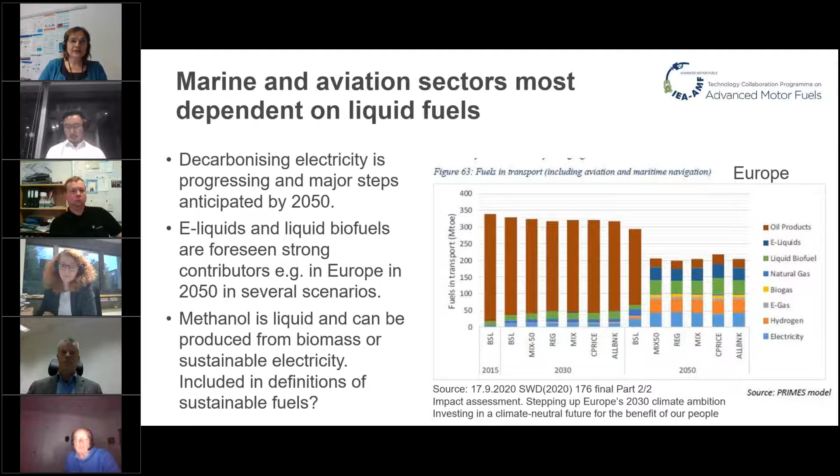If we look at marine engines and this sector as a whole, most marine fuels are used in large, slow-speed diesel engines, which are totally different from those used in cars or trucks. The medium-speed diesel engines are also different. These engines can be tens of megawatts, or 100 or more megawatts, and high-speed diesel engines are used only in smaller vessels.

Engines for large marine applications are available from two important manufacturers: both Wärtsilä and MAN have methanol engines available on the market. The Wärtsilä engine is a retrofit engine concept, whereas the MAN engine is used for new builds. As Martin mentioned, efficiency can be really high when using methanol as engine fuel, and that is important, especially in the marine sector, and some challenges are lower since they use constant speeds compared to road transport.

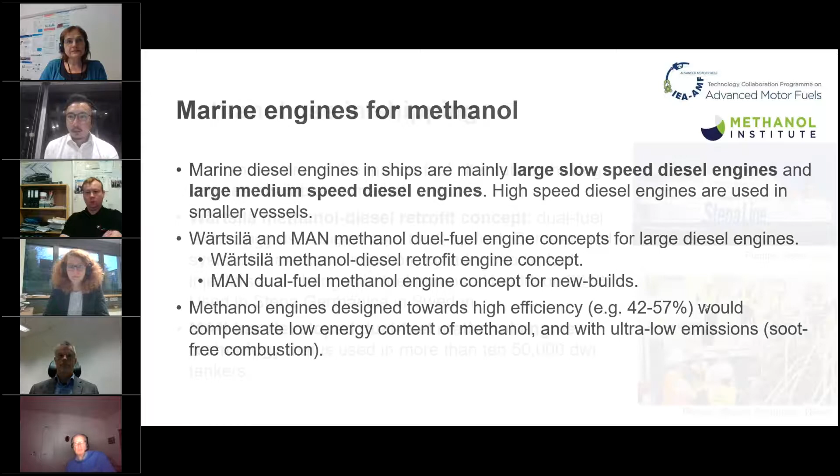Here you can see the Stena Germanica. I won't go into too much detail, as Martin already showed very nicely the engine combustion concepts and so on, so we can move on to the next slide.

This is an example of the studies that were carried out at VTT in 2015. This was the gas diesel concept which is actually used in Stena Germanica. NOx emissions already achieved in the first experiments were really low, tier 2.

Now one pathway is to study whether you could achieve tier 3 by blending water in methanol. Particulate matter emissions are low, as well as formaldehyde and other emissions. And after this, with more development, even less emissions are emitted.

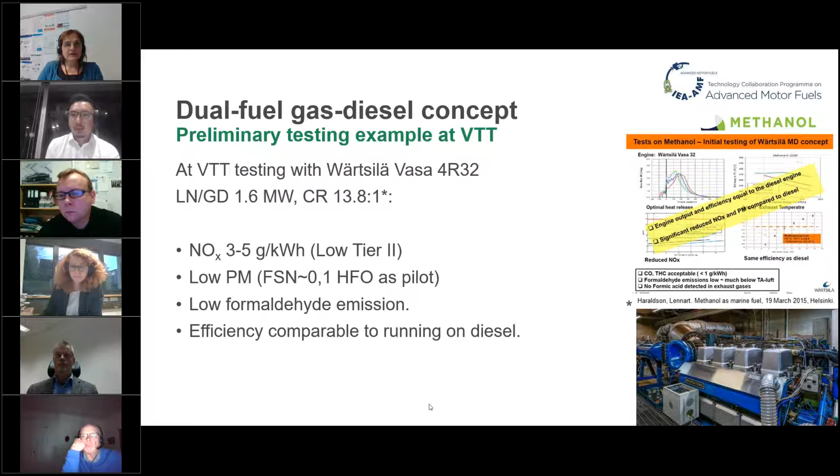As Martin already told, there is one special concept used in commercial Scania alcohol engines on the market for ethanol fuel, so ethanol with ignition improver additive. In one project, or actually two projects, the AMF project and the so-called Summit project, we studied the possibility to use methanol with ignition improver additive in this kind of engine. Now the Wärtsilä and MAN engines are large diesel engines, but this is a truck engine, so this could be a potential concept for smaller vessels.

This blend was burning very well, and emissions were really low. Some particle type of material was detected, which was originating from ignition improver additives, but it can be removed easily by the oxidation catalyst that belongs to this engine, the Scania engine concept.

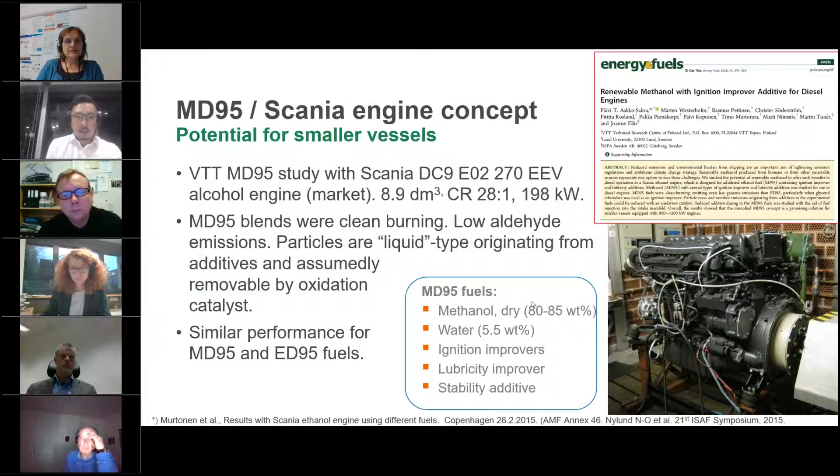The emissions were studied in a literature study within one project, and if you are interested in emissions from shipping, in this report you can find results. Here you can see black carbon emissions when using fossil fuels, biofuels, methanol, and natural gas. Methanol engines emit very low black carbon emissions, which is a very good feature, as ships can bring soot into the Arctic and Antarctic regions where it is very harmful for climate.

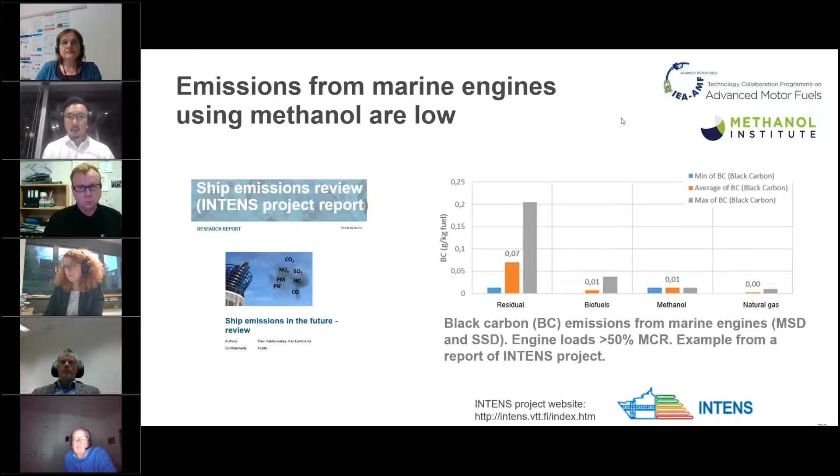A lot of this kind of project have been carried out in Sweden, and this project was a collaborative project between Sweden and Finland. You can find a lot of results of these demonstrations and other case studies.

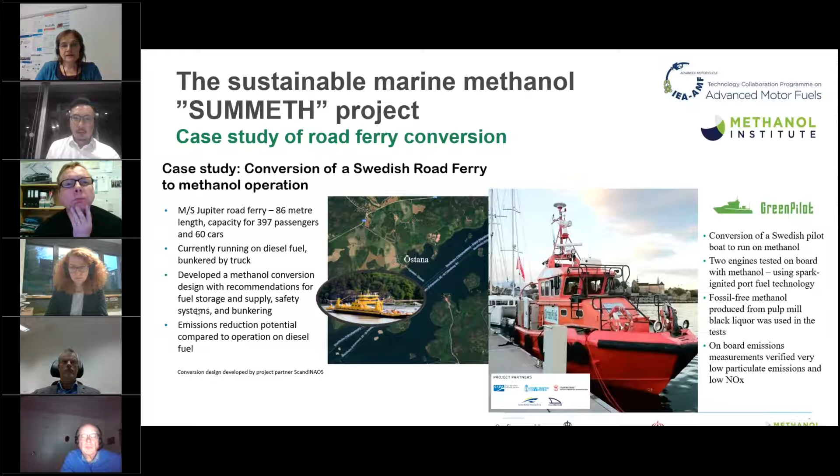A new project has started in Sweden. I think Martin could tell more about this. It's Fast Water, which studies marine methanol engines from different perspectives. Finnish organizations are not involved in this project, but we are looking forward to the results.

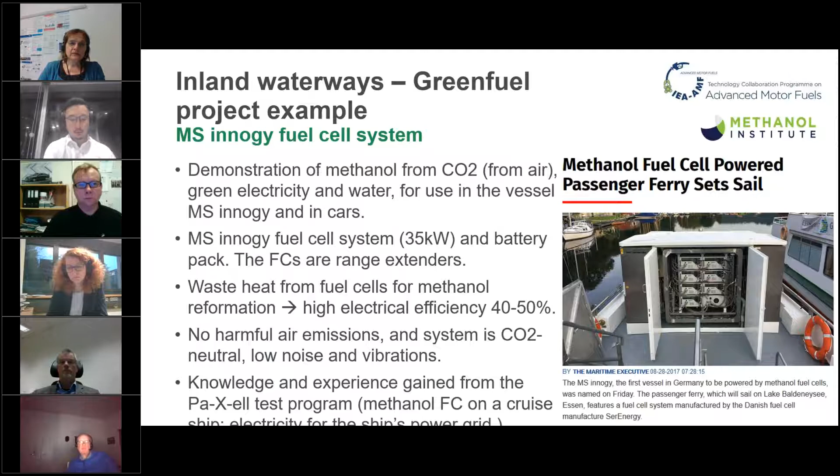This is an example of a project in Germany where methanol is used in fuel cells. The nice feature of methanol is that it can be used both as engine fuel and fuel for fuel cells. So you could even combine the combustion engine for methanol with fuel cells, especially in maritime. This is a quite interesting combination, as you could use the fuel cell as a range extender, or then to produce electricity for the ship.

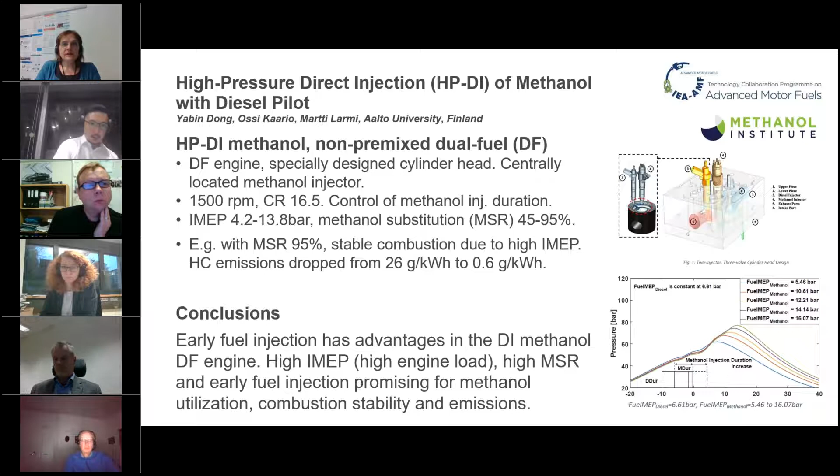In Aalto University in Finland, development work on engine concepts is ongoing. This project was SunFuels, where Aalto University was developing a dual fuel engine for methanol, and observed that early fuel injection has advantages for methanol combustion, emissions were reduced, and combustion stability improved.

So all in all, methanol features for maritime are very positive in many respects. Methanol, even though it has a lower energy content than diesel, it is a liquid fuel, and the energy content is not that much lower that the ships couldn't bear it. In addition, methanol can be placed in the double bottom of the ship, which saves space.

A good point is that methanol is already used as fuel, and it is a bulk chemical that is transported by ships. Methanol can be very climate friendly in a way that its greenhouse gas emissions can be low depending on its origin, and there are already engines on the market. Emissions are low, and high efficiency engines can be manufactured, and it is actually safer than gasoline in a way that it is biodegradable, so for the maritime environment it is quite safe.

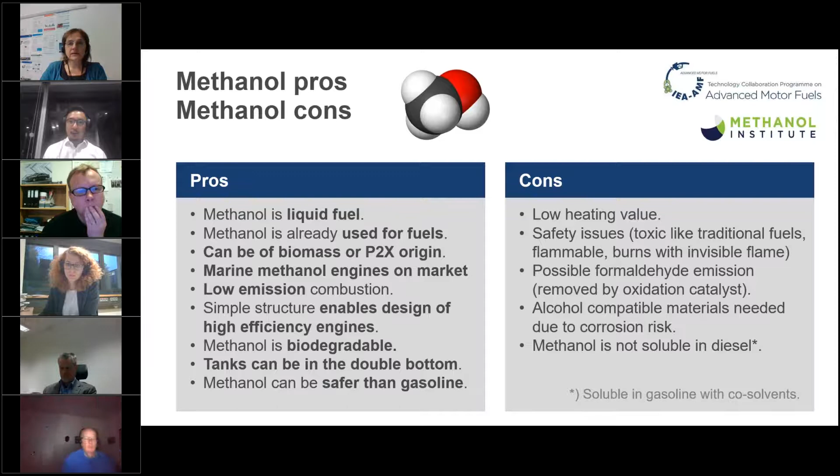So as a conclusion, renewable methanol offers potential to reduce both climate burden and health risks of shipping. The main points are that it is liquid and can have low greenhouse gas emissions as well as tailpipe emissions, and it can be used both in internal combustion engines and fuel cells. But of course, for renewable and sustainable fuels, the main hurdle is how to increase the production and how to do it fast.